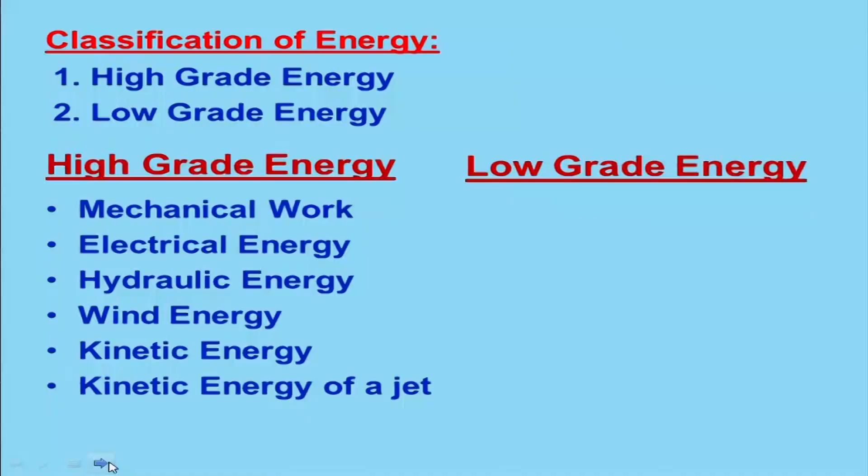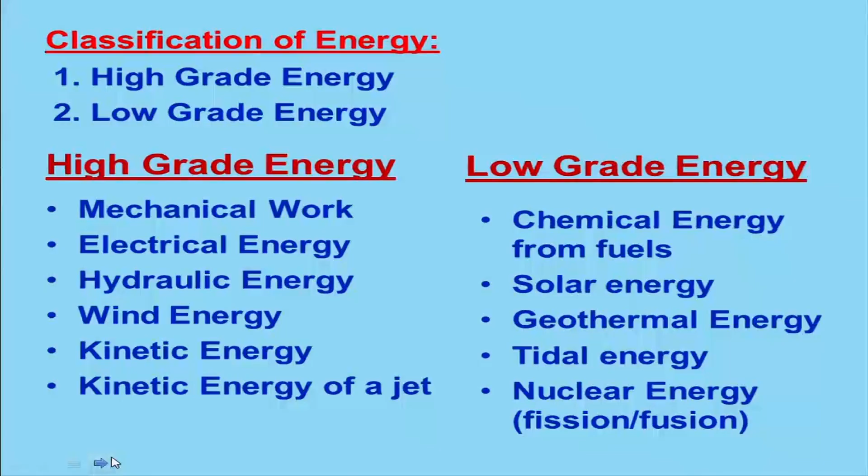But if you look at the low grade energy, it is basically chemical energy from fuel, solar energy, geothermal energy, tidal energy, nuclear energy, whatever we will be using as an energy source is basically low grade energy. So the objective of thermodynamics is to convert this low grade energy into high grade energy in the best possible manner, so that utilization will be maximum.

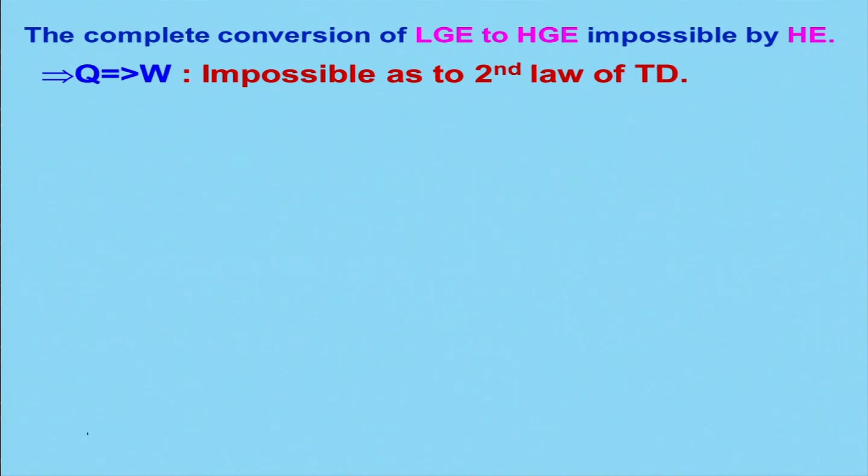We have seen that complete conversion of this low grade energy to high grade energy is not possible by a heat engine, according to the second law of thermodynamics. Therefore, a certain amount of heat has to be rejected to the sink whenever an engine takes a certain amount of heat from the source, so that the work can be done.

Available energy, basically, is part of the low grade energy which can be converted into high grade energy by a reversible engine. We call that amount of energy basically available.

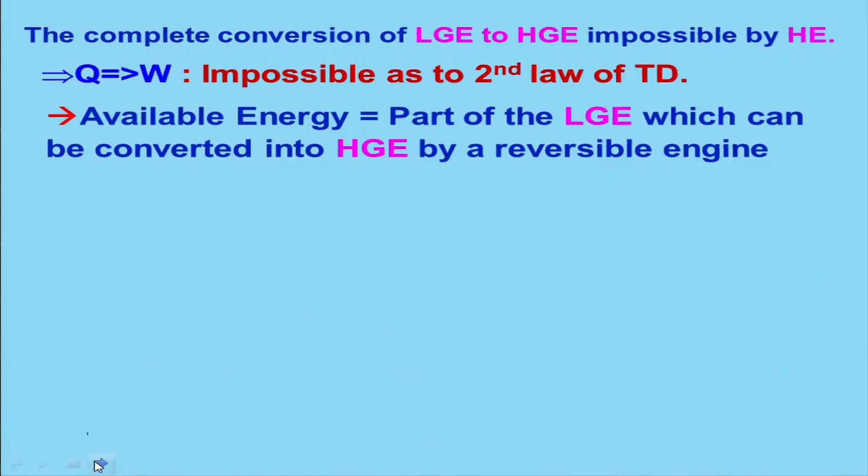To consider that case, we take this example of a reversible engine, of course the ideal one, but to discuss the point we are making: it is absorbing Q amount of heat from the source and rejecting Q naught amount of heat to the sink, which is at T naught temperature, and doing W amount of work. So now in this case we need to find out what is the availability.

Let us look at what will be the efficiency for this engine. This is a reversible engine, meaning basically a Carnot engine. By definition, W by Q is equal to 1 minus T naught by T, yes or no, in this example. So I can write W is equal to Q into 1 minus T naught by T. Can I not write this simply? I will take this side here, and then take this side, and that will be done.

Now we can say that W is nothing but Q minus T naught into delta S, the change in entropy. Can I say this or not? Yes or no? Because if I just take Q by T, we can say that is nothing but the change in entropy, Q by T, and multiplying by T naught gives that.

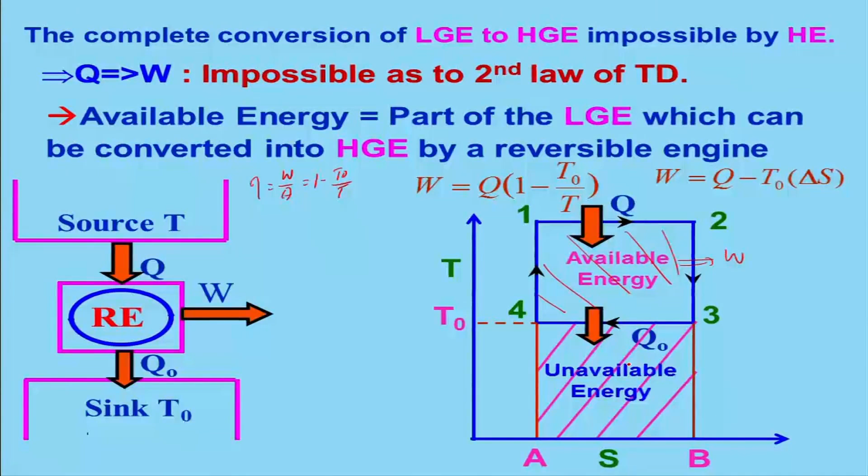If you look at this region, the amount of heat going to the sink is Q naught, and this portion is known as unavailable energy. It is not available for you. Once it goes to the sink, you cannot really take it out and do any amount of work.

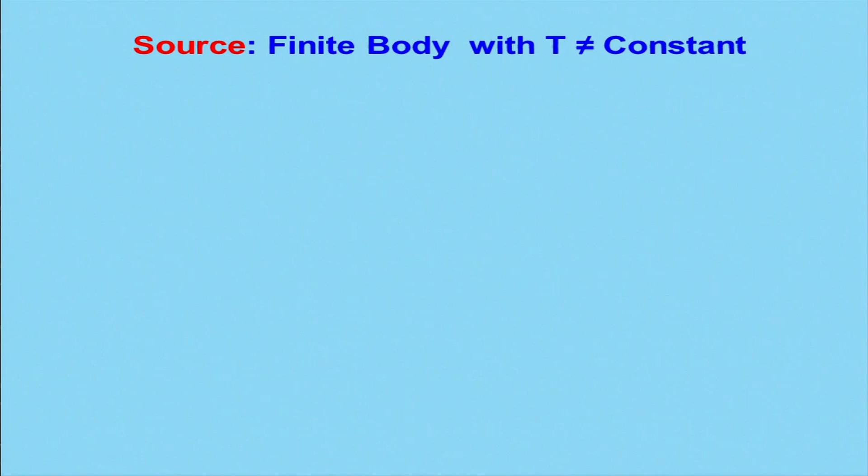And that is what we have seen with the source temperature remaining constant and sink temperature remaining constant. Now we will consider a case where you are taking some amount of heat from a finite body where the temperature is not remaining constant.

So we can write down from the efficiency definition that dW is equal to eta into dQ, and we know that if it is a reversible engine, then eta is equal to 1 minus T naught by T. So if I integrate this, I will get W is equal to Q minus T naught into delta S, and this Q minus T naught delta S is nothing but your available energy, and we call it also the useful work potential.

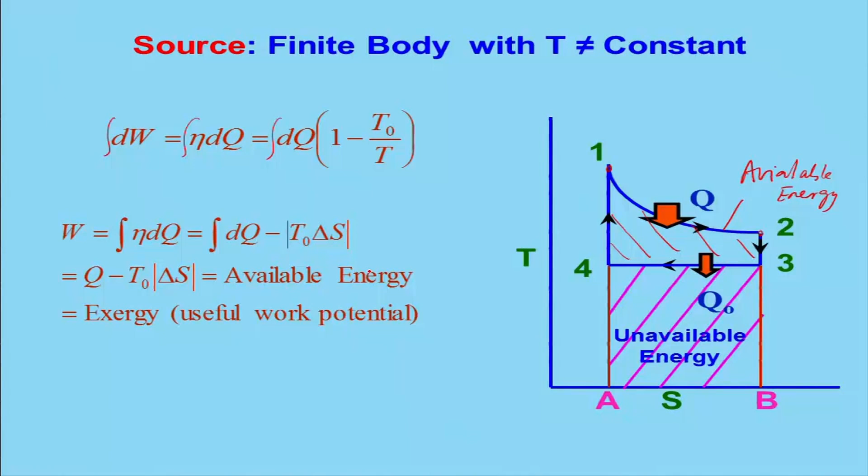And we call it also the exergy. So we will be using exergy and available energy interchangeably, both are same. Of course in some places you may find there is a little difference, but we will not be using that difference. We will be saying that exergy and available energy is same.

So if you look at our life, what is exergy then? What is the available energy? It is basically your talent, whatever you are having in the circumstances, you can use it. But if you will not use that, it will be useless. Even if it is with you, you may be a talented person, but it can't really express in terms of your productivity or the work. So that is the amount of energy what is available, which can be converted into useful work or reversible work, that is known as available energy.

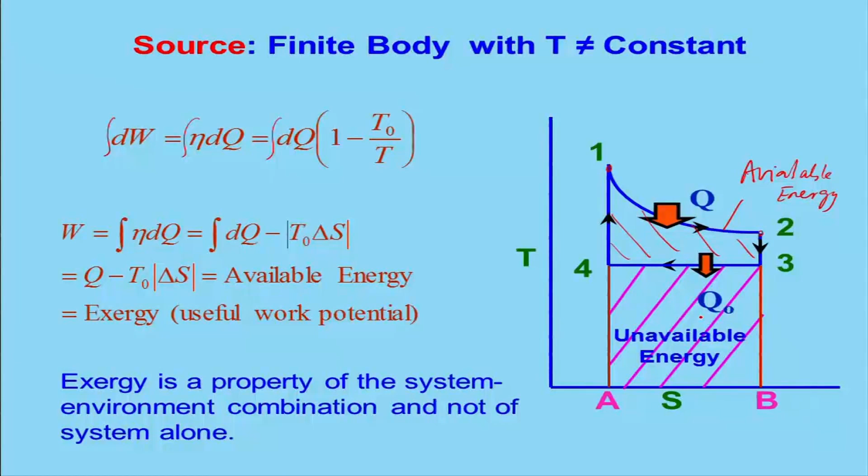So exergy is a property of the system and environment combination, not a system alone. Why? Because it is giving to a thermal reservoir, which is at some low temperature. So therefore, availability or exergy, whatever you call it, we can use as synonyms, exergy is a synonym for available energy, and is a property of the system and its surrounding, or you call it environment, together. It is not a property of the system alone, because earlier we said entropy is a property of the system, and also the internal energy.

So for available energy we can consider another example, like let us say there is a hot body here at temperature T1 and there is a cold body at temperature T2, and heat will transfer some amount Q. Keep in mind that T1 is greater than T2. So if I say I want to find out during this process what is the change in available energy, keep in mind that T2 need not be the ambient temperature, it may be higher or lower, whatever it may be. Let us say T1 is 1000 Kelvin and T2 is 500 Kelvin, for example.

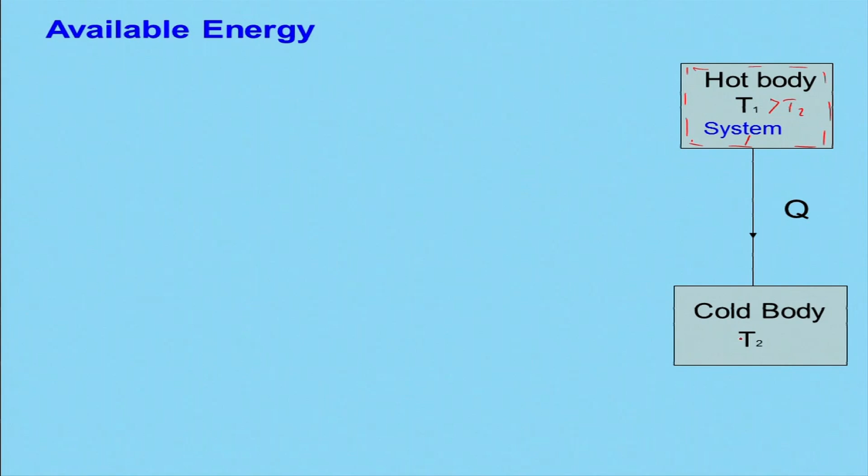Then what will happen, some amount of heat will be transferred from the hot body to the cold body, and we can consider this as a system. And naturally what will be its surrounding? If I look at this as my system, what will be the surrounding will be this, right, for this. And the heat energy transfers through the temperature gradient, because T1 is greater than T2 in this case, and it is an irreversible process. You cannot really get back those things, you cannot.

So is there any loss in available energy, because a certain amount of energy is available here. What is that loss, we need to look at it, loss in available energy. Let us look at that.

If this process goes on like it takes place, the initial available energy would be Q into 1 minus T naught divided by T1. What is T naught here? That is the ambient temperature. Let us say our ambient temperature will be something 40 degrees Celsius. If you go to winter it will be 25 degrees Celsius or 20 degrees Celsius. So that is the ambient temperature.

And T1 is the temperature which is, therefore, this initial available, because if I want a sink I can use the air as my sink, or I can take another reservoir and take a sink. That means beyond that I cannot really go, it will not be possible. So therefore initial available energy is Q into 1 minus T naught divided by T1.

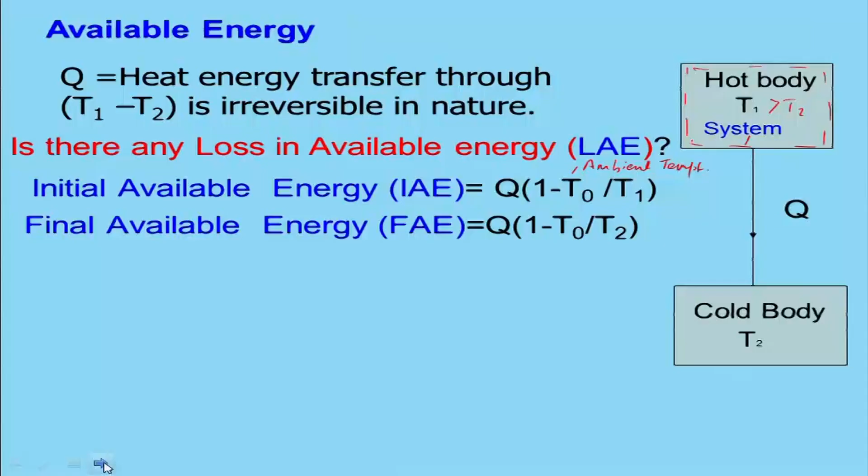So the loss in available energy, using the short form LAE, is equal to initial available energy minus final available energy. That is nothing but Q into 1 minus T naught by T1 minus Q into 1 minus T naught by T2. If you simplify it, this is Q minus Q T naught by T1 minus Q plus Q T naught by T2, and Q will cancel out. So therefore you get T naught into Q divided by T2 minus Q divided by T1.

If you look at T naught and Q by T1, T2, this represents the system, and what about the surrounding? Since you are taking Q out from here, that will be negative, because when heat is going out of the system it is known as negative sign. So this Q going to the surrounding becomes positive. So therefore, for system and surrounding, this will basically be Q by T1 and this is Q by T2. And that is nothing but T naught into the change in entropy of the universe, system and surrounding.

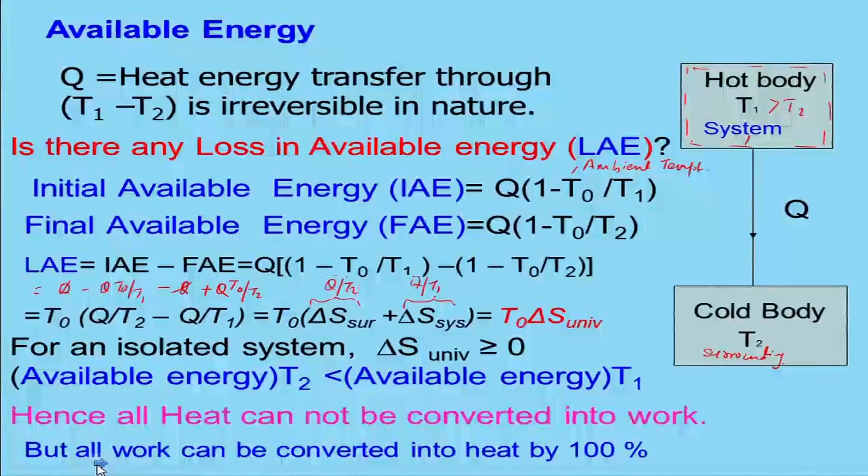So hence all the heat cannot be converted into work, as we have seen from the second law of thermodynamics, but however, all the work can be converted into heat by 100%. That means if I want to convert work into heat, it is 100% possible, but the reverse is not.

So let us look at the availability for a control mass system. We will consider a piston cylinder arrangement which contains gas at pressure P1 and volume V1, with some heat interaction Q, and the ambient pressure is P naught and T naught. Let us say it is fixed with a pin, and I will release it, I will remove this pin. What will happen? Removing this pin, the piston will go up, and it will go up till the pressure of this gas reaches P naught, the same pressure.

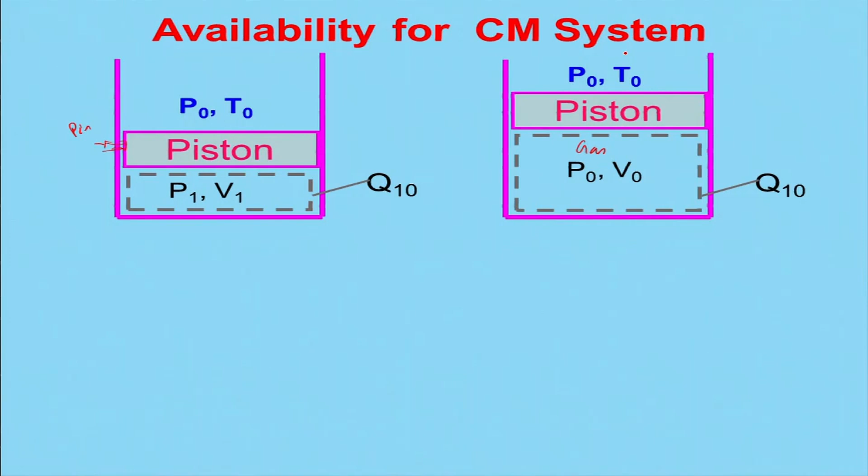And if you look at this, this is my state 1 and it is going to state 0, because that is the dead state. It cannot go beyond, unless you give work done the piston cannot move up, because it has already reached equilibrium with the ambient pressure.

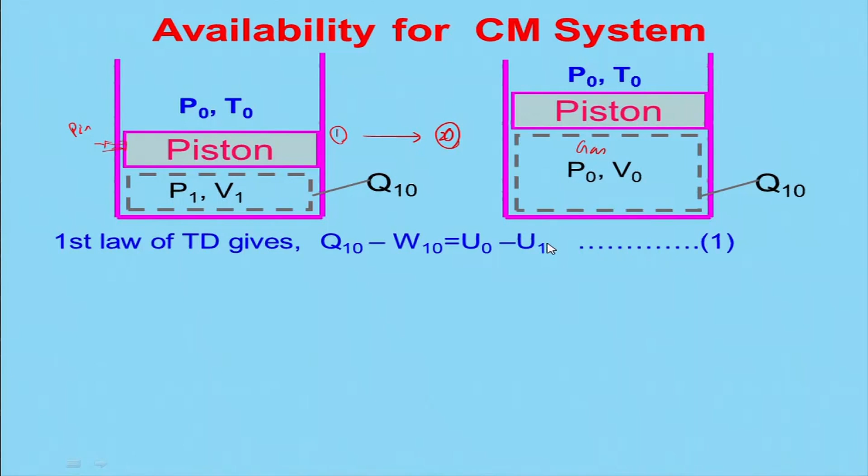According to the first law of thermodynamics, Q10 minus W10 equals U naught minus U1. This is the 0 state and this is the first state, which I call the dead state in this case. The second law of thermodynamics will be: change in entropy of the system plus change in entropy of surrounding equals Sg, the entropy generation.

The system entropy change is S naught minus S1. The surrounding entropy will be Q divided by T surrounding. T surrounding in this case will be T naught, and Q surrounding will be Q10. Keep in mind, this heat is going out from the system to the surrounding, so therefore it will be minus.

From this equation you get the change in entropy, S naught minus S1, minus Q10 divided by T naught equals Sg, during this process. I can rewrite by multiplying both sides by T naught, which cancels out, giving T naught times (S naught minus S1) minus Sg times T naught equals Q10.

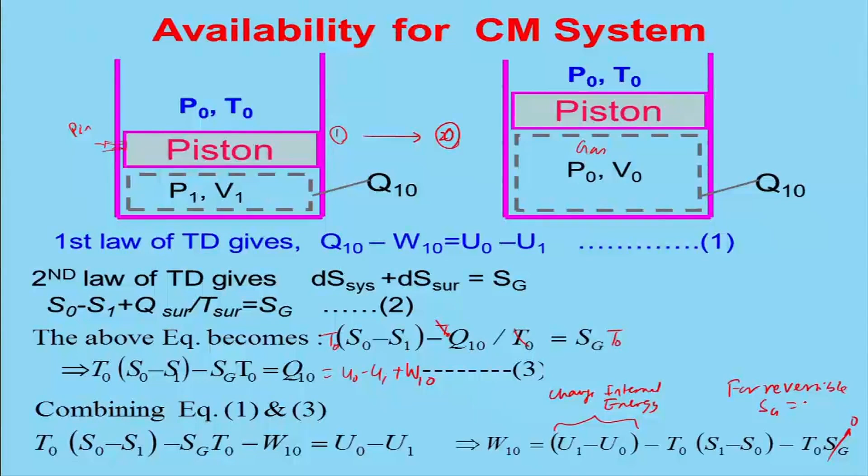So if we do that, we can get the expression: reversible work equals the change in internal energy, U1 minus U naught, minus T naught times (S1 minus S naught).

Now, what is the useful work? Reversible work is the maximum work, but what is the useful work for this system? Looking at this example, when the piston is moving up, it is doing some work on the ambient air. That we have not considered before, but now we will be considering it. As I mentioned, certain work is expended doing work on its surroundings, as the surrounding atmospheric air is being pushed.

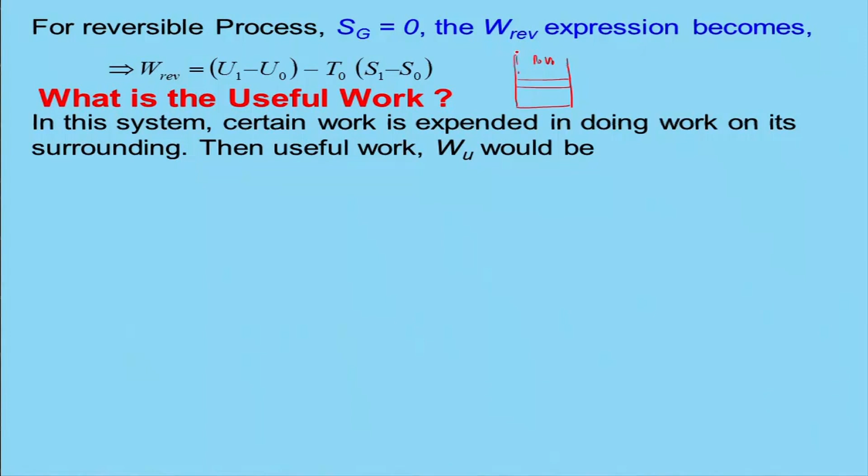For example, if we take a piston cylinder here, with P naught, V naught, there is gas inside. When it moves to the next state, this gas volume changes as the piston moves. At this point it is P naught V naught, and initially it was P1 V1, going from state 1 to state 0.

Now, the useful work will be basically the reversible work minus the work done on the surrounding by the piston in this example.

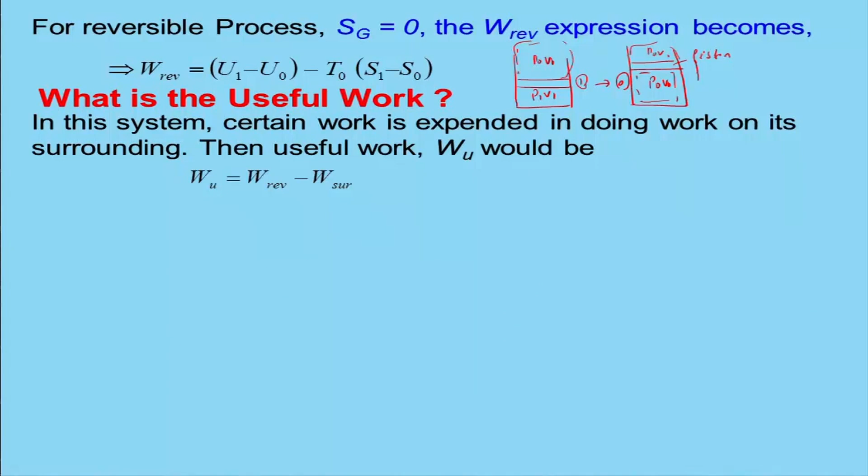So, the work done on its surroundings due to expansion of the piston or the movement of the piston, what would it be? It will be P naught into V naught minus V1. Earlier it was start with V1 and it becomes V naught, right. So that is the movement taking place, the change in volume, that is the work done on the surrounding by the piston movement.

So the useful work will become basically Wu, nothing but this portion reversible work, that is U1 minus U naught minus T naught in the bracket S1 minus S naught, that is the reversible work. This portion is your...

reversible work and this is your surrounding work, and I can write this down as U1 plus P naught V1 minus T naught S1, right. I can separate it out and I can say that U naught plus P naught V naught minus T naught S naught.

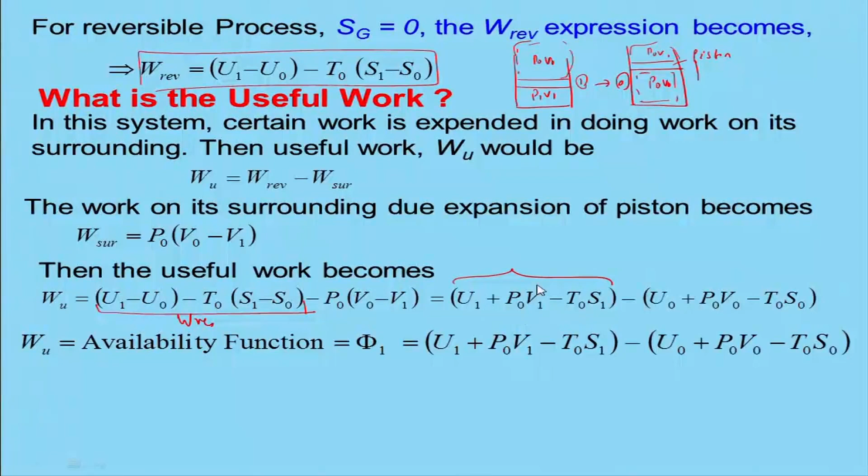See, this is simple. So this quantity, right, we call it basically the availability function itself, that is phi 1, and this is for the state 1, and this is the dead state, right. If you look at this, we call it the dead state. These together will give me the availability function phi 1.

And when a system moves from 1 to 2, we have said it is going from state 1 to dead state, that is the 0 we are calling. And when it will be, what would it be? It will be nothing but phi 1 minus phi 2, and this term will be cancelled out in this case. So therefore we are getting U1 plus P naught V1 minus T naught S1,

and this is basically phi 1, the availability function for state 1. Of course, do not consider that because this is being cancelled out, and this is for the state 2.

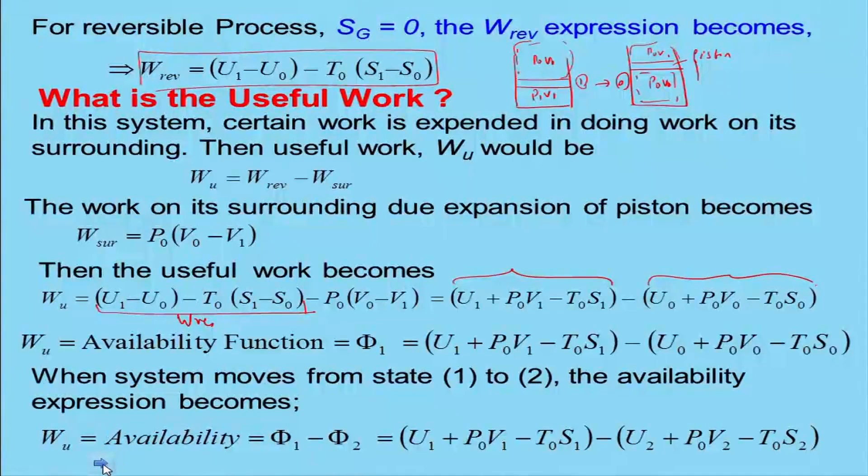So if you look at, we have seen that let us say you are at initial state, state 1, and this is my dead state, and you have gone from state 1 to state 2. That means what is the availability for state 1? This is 1, right. For the availability of state 2, this one. This portion is the availability for state 2. Are you people getting what I am saying?

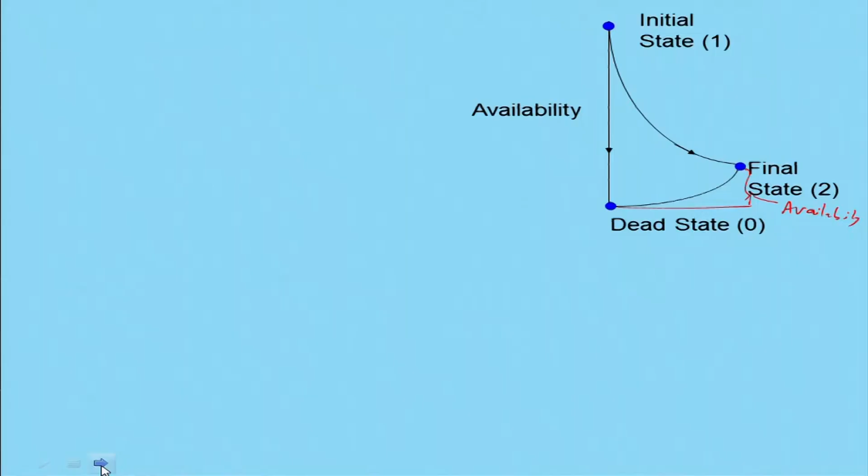And then, because availability is basically with reference to the dead state, I will give an example which generally happens: if you keep money in the bank, let us say 5,000 rupees, you can spend the money till what you call 1,000 rupees. You can say, okay, bank cannot give beyond let us say 1,000 rupees. So if you look at it, it has reached the dead state.

So kind of things, and if you look at, that means this is availability. And I will give another example. Suppose you are very alert in the morning time, I hope you are, right. So generally people are very alert in the morning time, then in the evening time they will be very tired and can't really look. That means you have reached a dead state. Then you will have to go for sleep and take rest, rejuvenate, and then come back and do work.

So availability basically says how much work one can do with respect to your reference, that is the dead state. And maximum useful work obtained in a process when a system comes to equilibrium with the surrounding, that is the dead state, is what we consider as basically the maximum useful work.

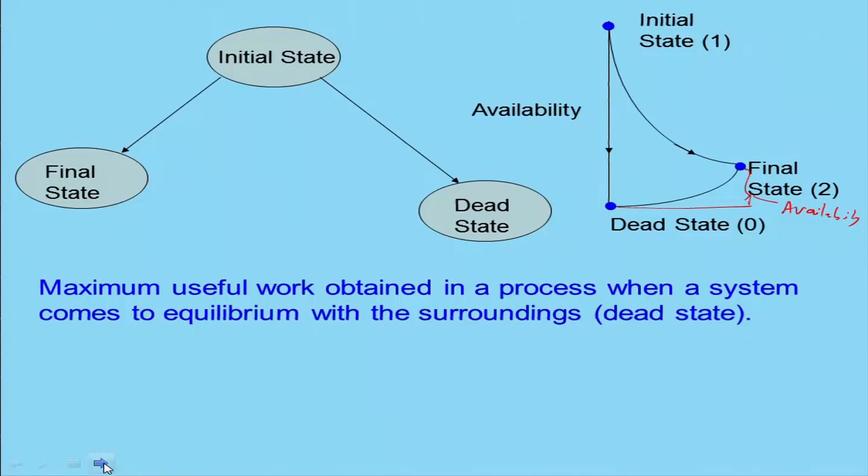And the irreversibility, what would it be? That is basically the reversible work minus the useful work, which will give me the irreversibility. This is basically easy because the entropy generation with reference to the temperature, that will give me the energy being lost in the irreversibility.

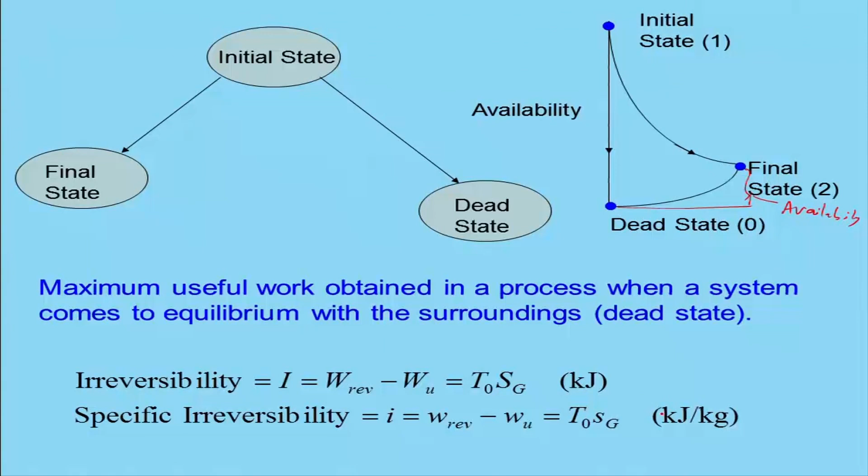And keep in mind that in the piston example, if the piston is moving up and doing some work on the surrounding, you cannot get it back, it is irreversible. So specific irreversibility I is equal to reversible work minus the useful work, that is T naught into Sg, that is the specific irreversibility, and its unit is kilojoule per kg.

So what we have seen, this is for the control mass system, but we need to handle also the control volume or the flow systems, and we are considering the flow process to be steady for this.

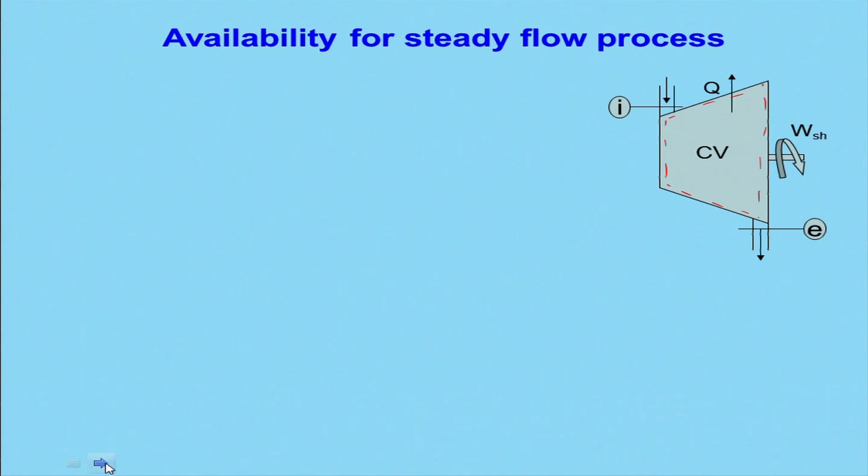So, let us say that there is an expansion of the gas in a turbine taking place, and it is entering at the inlet and leaving at the exit, and some work is being done because the turbine expansion is going on. You can consider this as my control volume. And the reference here, this is your surrounding. If you look at this, this is your surrounding, and some heat is going out, and this is your dead state, you can say it is a sink kind of thing. This is your surrounding.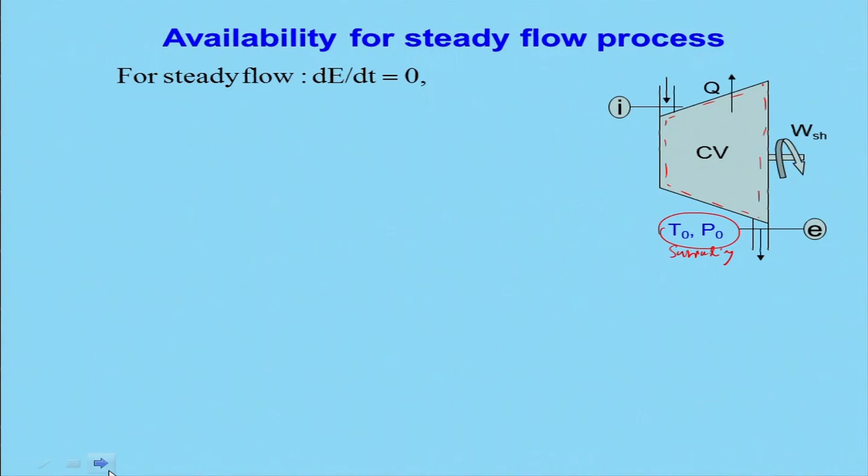So, for a steady flow process, we know the change in energy will be basically equal to zero with respect to time. And we can write down the first law of thermodynamics for the control volume: m dot E into H E plus V E squared divided by 2 plus g Z E, minus m dot I, H I plus V I squared divided by 2 plus g Z I, is equal to the heat rate and also the work rate, shaft work.

And the second law of thermodynamics will be basically the entropy generation is equal to m dot E, S E minus m dot I, S I, plus q dot surrounding divided by T naught. Keep in mind that heat is going out from the system boundary, therefore it will be negative. So q dot by T naught, q dot surrounding, is nothing but q dot with a negative sign.

Now, what we will do is multiply this equation by T naught. So this will be T naught, and if I do that, this will cancel out, and then you multiply it here and use this in the equation. If I call this equation 1 and this equation 2 combined, we can get a relationship.

That is, shaft work is nothing but the enthalpy change, and then kinetic energy and potential energy, and also there is a new term which has come, T naught times S I, multiplied by the mass flow rate at the inlet, and similarly at the exit, minus T naught S dot G.

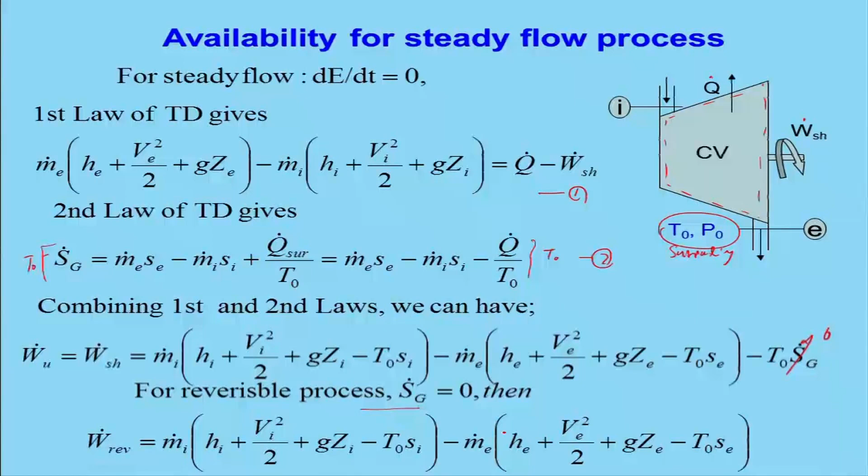So, for a reversible process, of course, the entropy generation will be zero, because this is a reversible process. So you can get the reversible work is basically the change in energy, and also what we call, we will define this term availability. So this is also the change in availability at the exit.

So the reversible work, that is the availability or the exergy, can be expressed as basically the availability at the inlet minus the availability at the exit, and this psi I have used, that is basically the availability function, and people call it the exergy function also.

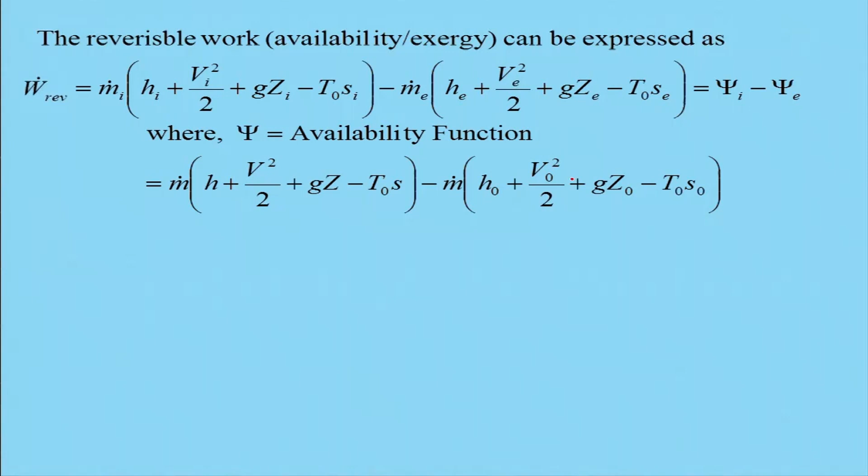And keep in mind that the availability function is written with respect to the dead state, in a similar way to what we have done for the control mass system. These are all dead state, 0 means dead state kind of things. And if you take inlet and outlet, this term will basically cancel out.

So if there is a multiple stream device, right, a heat exchanger kind of thing, what will be the reversible work? That will be nothing but the availability function change, of course, if there are several inlets. Let us say n number of inlets, then you can say availability at the inlet, and similarly availability at the n exits can be different, and you can get what will be the useful work.

In this case, the reversible work and the useful work are the same, because... And irreversibility, you can calculate as W dot reversible minus useful work.

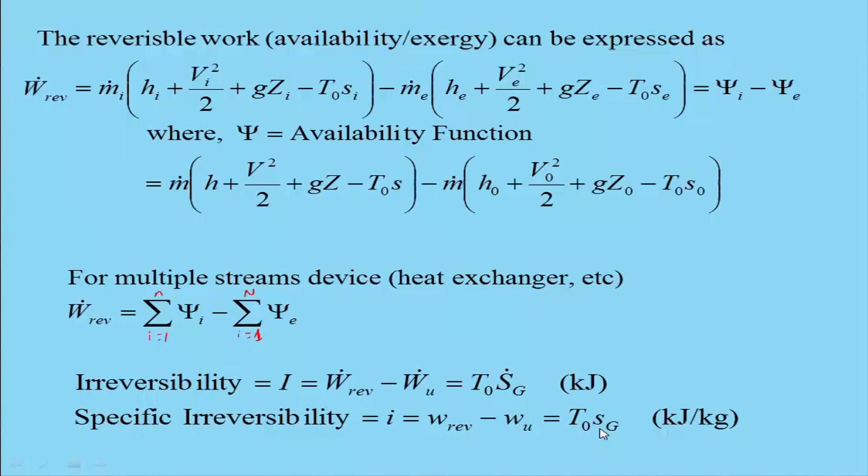That is equal to T naught S g, because in case of reversible work, S g will be zero. So therefore T naught S g is coming, and specific irreversibility is nothing but reversible work minus the useful work, that is T naught S g. It is similar to that of the control mass system.

So the question arises how to evaluate the performance of a device, that we need to work out and find, because the second law of thermodynamics will help us to evaluate it, and what extent of improvement we can achieve by minimizing the irreversibility, that we can do.

The performance of a device can be evaluated in terms of thermal efficiency and COP. COP is basically for the refrigeration system and heat pump system, whereas thermal efficiency is used for the heat engine. The maximum work from a device can be achieved by improving the thermal efficiency and also using higher quality of energy. That is one way of improving or maximizing the work.

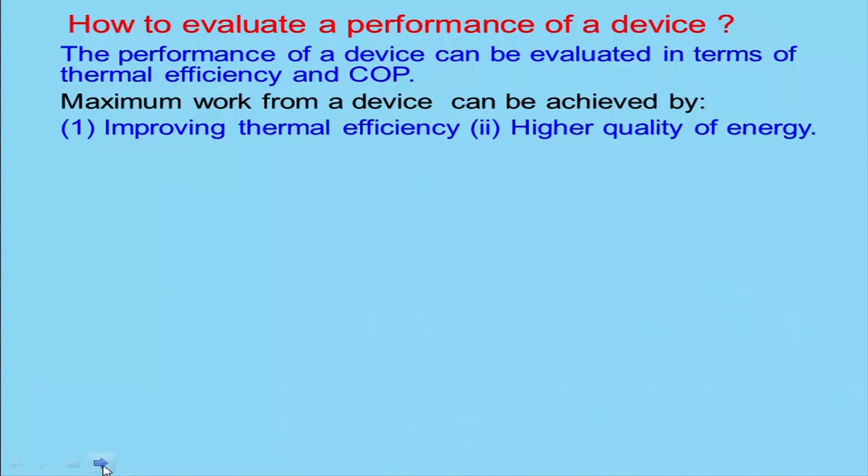Let us consider a turbine in which the gas is expanded from P1 T1 to P2 T2, and some shaft work is produced. This is the constant pressure line P1, and there is another constant pressure line P2. The expansion taking place from state 1 to 2 is known as isentropic expansion, where entropy remains constant, so S1 equals S2S. And this is the actual process, actual expansion, from state 1 to state 2.

So we can define the efficiency for this isentropic process as the ratio of W divided by the reversible work done. What is this work done? If I consider change in kinetic energy and change in potential energy equal to 0, and steady flow process, then W is nothing but H1 minus H2. For the reversible or isentropic process, that will be H1 minus H2S. So the isentropic expansion is the ideal, and H1 minus H2 is the real.

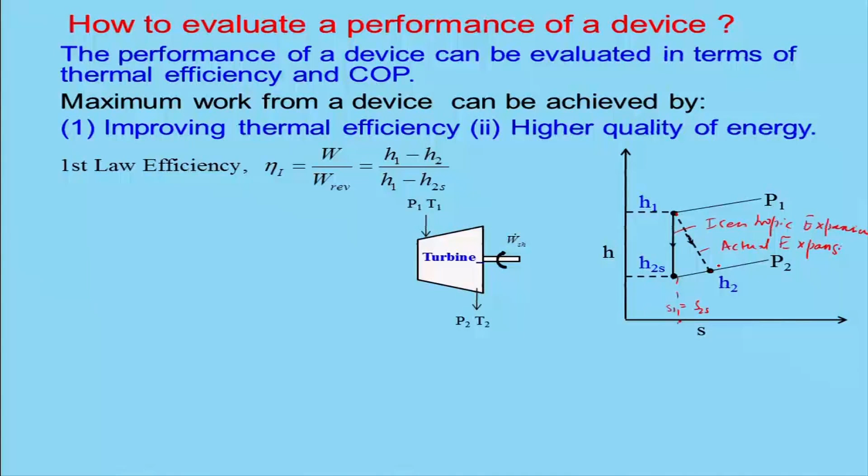Consider a heat engine with efficiency of 30%, and another heat engine operated between a source at 1000 Kelvin with the same sink, which also has efficiency of 30% - both having 30% efficiency. But from the Carnot efficiency, heat engine A operates between source temperature 600 and sink, giving a Carnot efficiency, whereas for heat engine B the Carnot efficiency is 70%. That means in which engine case is there more scope for improvement? Definitely heat engine B. There is a lot of improvement that can occur, although both are having 30% efficiency. That means there is a lot of scope - you can say exergy is available for you to exploit for improving its efficiency.

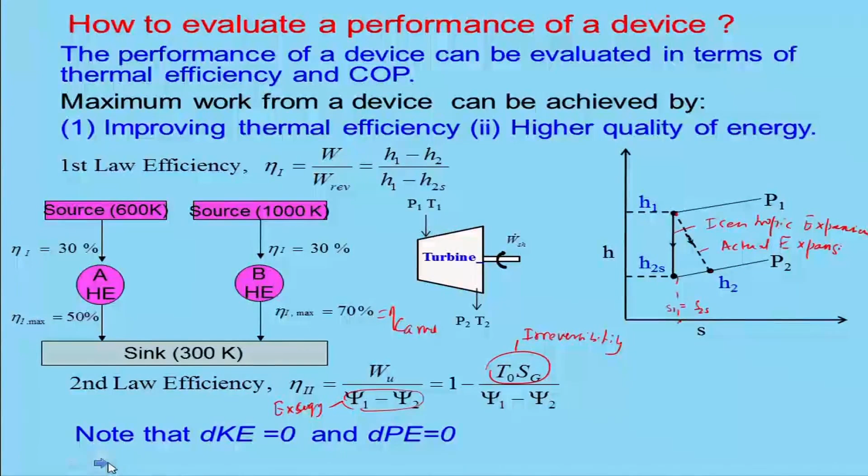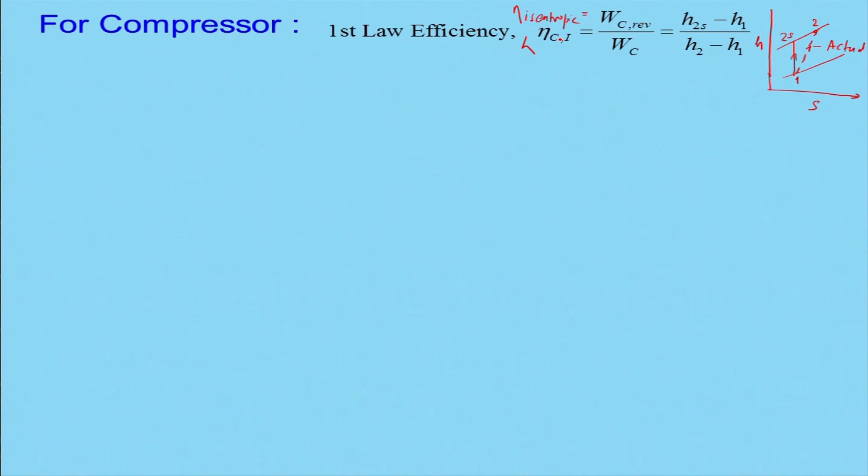We have discussed change in kinetic and potential energy being 0. Now let us look at a compressor. In the compressor, the first law of efficiency is nothing but the reversible work input to the compressor divided by the actual work input. If I plot H and S, this is the pressure line - process 1 to 2, with 2S corresponding to the isentropic process where entropy remains constant, and 2 being the actual process. So efficiency equals H2S minus H1 divided by H2 minus H1 for the compression, and this efficiency we call isentropic efficiency.

This is the same as for the compressor, and you can call it the first law of efficiency, or isentropic efficiency, because the reference is the isentropic process. The second law of efficiency will be the reversible work, same definition, divided by the useful work - that is psi 2 minus psi 1, the change in availability, divided by the useful work.

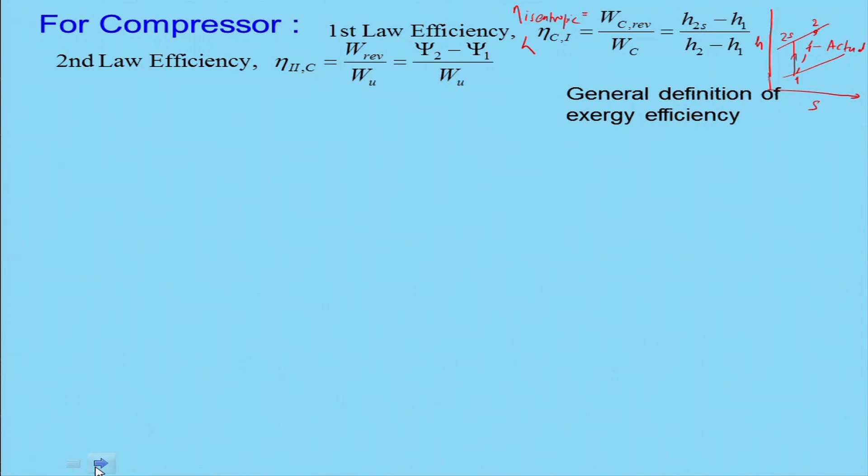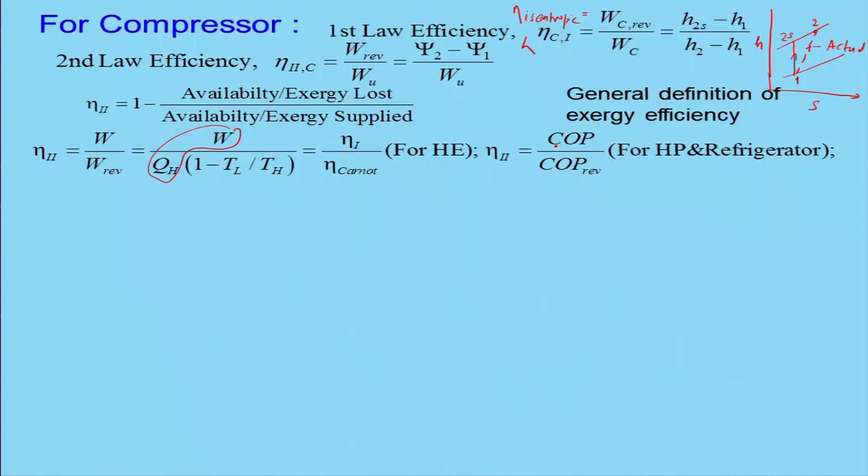If you look at the second law of efficiency, one can solve out exergy lost divided by exergy supplied. The second law of efficiency is nothing but W by W reversible, and W reversible from the Carnot engine we can write as QH times 1 minus TL by TH. This is nothing but the first law of efficiency divided by the Carnot efficiency, which gives you the second law efficiency. Similarly, for the heat pump or refrigeration, COP divided by COP reversible gives you the second law efficiency for that system.

Consider a heat engine where the source is at 1200 Kelvin, from which QH amount of heat is taken, and QL amount of heat is rejected to the sink at 300 Kelvin, while doing work W. The first law efficiency in this case is 1 minus QL by QH, which happens to be 75%. If you look at the Carnot efficiency, that is the reversible engine efficiency, it is also equal to 75%.

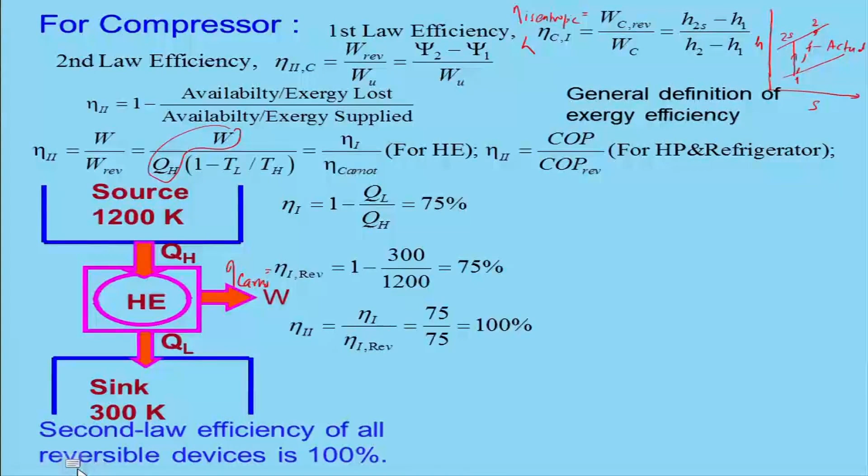So what would the second law of efficiency be then? It is the ratio of the first law efficiency divided by the first law efficiency for the reversible process, or the Carnot efficiency. Therefore, it is 100% efficient. If the second law of efficiency is 100%, it says there is no scope for any improvement of this engine. In other words, it also says this is a reversible device, otherwise it cannot really have 100% efficiency.

Let us consider a cup of hot tea at a certain temperature. Take the system boundary as the hot tea or cup itself, and q amount of heat is going out to the ambient, which is at T naught, P naught. That amount of heat is basically going to waste, meaning it cannot really be utilized because it has gone to the dead state. So the second law of efficiency of naturally occurring processes is 0, as none of the work potential is recovered, so you cannot really recover it.

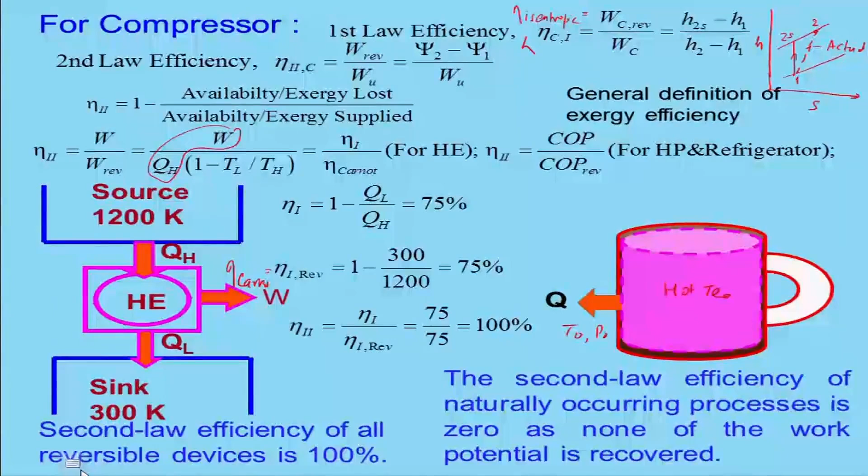Consider the availability concept: a lot of energy is available. For example, the sea has a huge amount of water at ambient temperature. If you multiply it out, that would be several billion joules, but we cannot utilize it because its availability is almost 0. Similarly, the air around the earth has a large amount of energy. If you calculate how much air is around the earth at temperature T and multiply by Cp, it will be enormous. Even if we tap 10% or 20% of that energy, we could solve the energy scarcity problem, but we cannot use it because its availability is 0, it is at dead state.

This is what the availability concept and exergy are about, and it is very useful for finding out how you can improve the performance of a particular system or process, by identifying the causes of irreversibility and eliminating them. This also talks about the quality of energy, as we have seen. So it is a very useful concept which is used to optimize systems and processes.